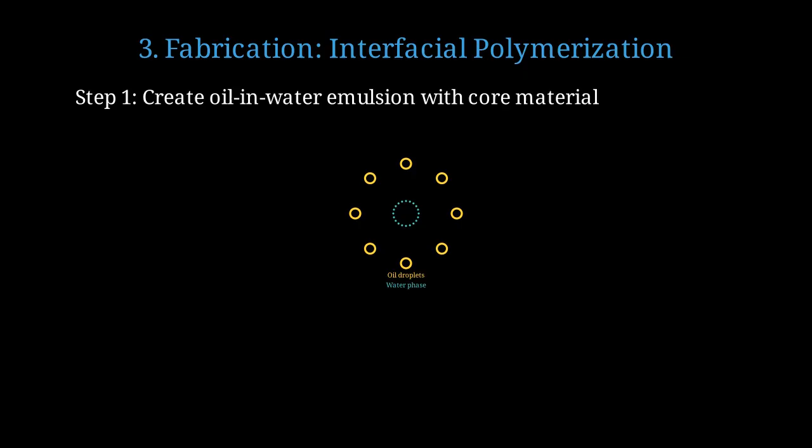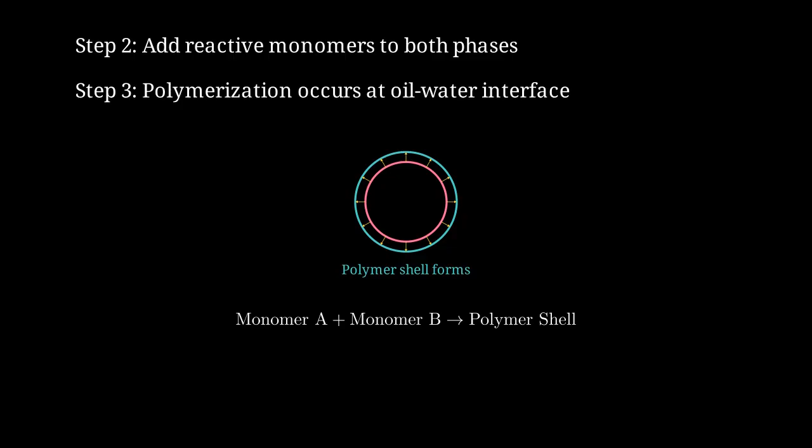Next, we add reactive monomers to both the oil and water phases that will meet at the interface. When the monomers meet at the droplet surface, they react and polymerize, forming a solid shell. The polymer shell forms spontaneously at the interface, encapsulating the core material in a protective barrier. This reaction between two monomers creates the polymer network that becomes our capsule shell.

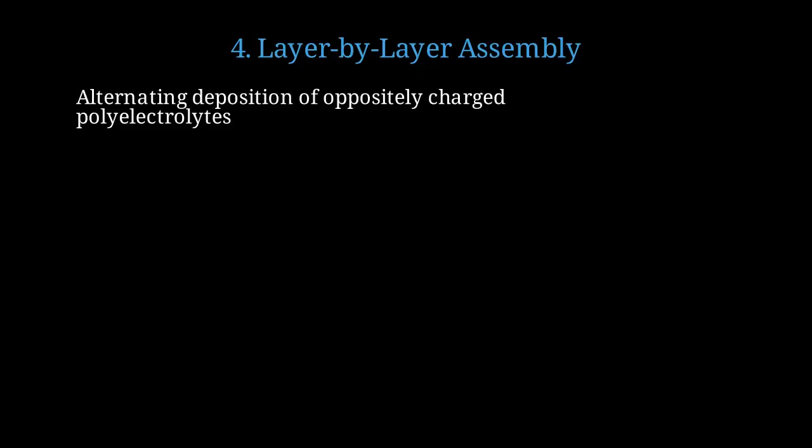Another powerful technique is layer-by-layer assembly, building shells one molecular layer at a time. We alternate deposition of positively and negatively charged polymers, building up layers through electrostatic attraction. Each layer adds about 1 nanometer of thickness, allowing precise control over shell properties and permeability. This technique gives nanometer scale precision in shell thickness and composition.

Now let's understand the mechanical behavior of these thin shells using continuum mechanics. The Laplace law is fundamental for understanding how pressure differences are balanced by shell tension. ΔP = 2γ/R, where γ is surface tension and R is capsule radius.

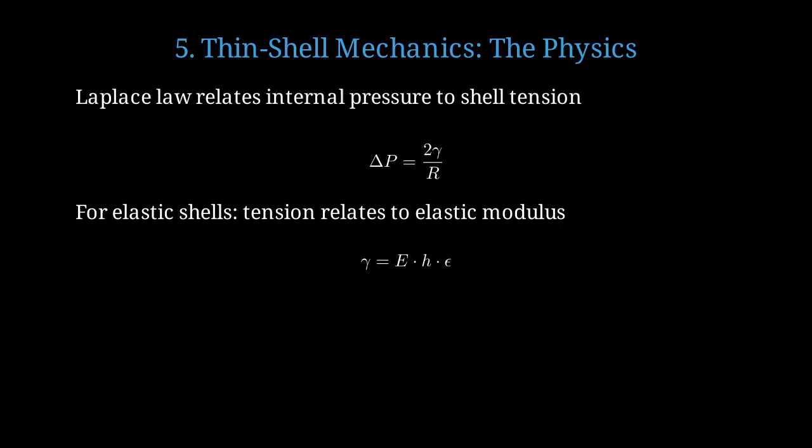For elastic shells, we must relate tension to the material's elastic modulus and shell thickness. γ = E·H·ε, where E is elastic modulus, H is shell thickness, and ε is strain. Combining these, the pressure difference equals 2EHε/R.

Shells buckle when compressed beyond a critical pressure, determined by geometry and elasticity. Critical pressure is approximately EH²/(R²(1 − ν²)), where ν is Poisson ratio.

Let's solve a practical design problem. How thick must a capsule wall be to survive blood flow but break in the stomach? In blood vessels, capsules experience shear stresses of 1 to 10 pascals from flowing blood. In the stomach, capsules face both acidic conditions and mechanical pressure of 100 to 1,000 pascals from churning.

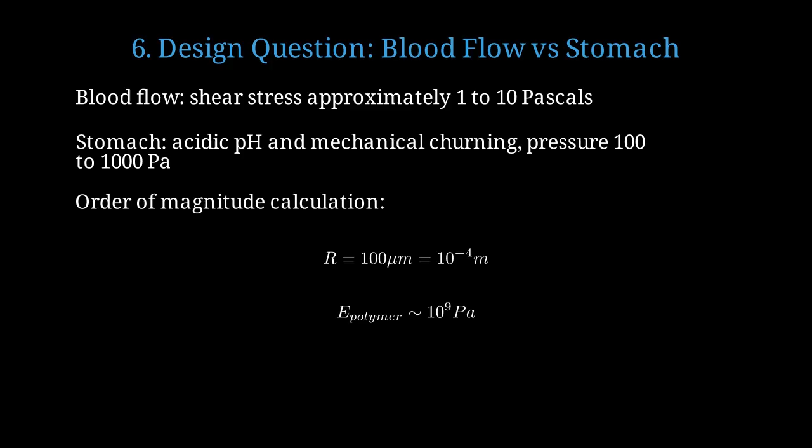Let's do an order of magnitude calculation to estimate the required shell thickness. Assume capsule radius of 100 micrometers, which is 10⁻⁴ meters. Typical polymer elastic modulus is around 1 gigapascal or 10⁹ pascals. Blood pressure is 10 pascals. Stomach pressure is 500 pascals.

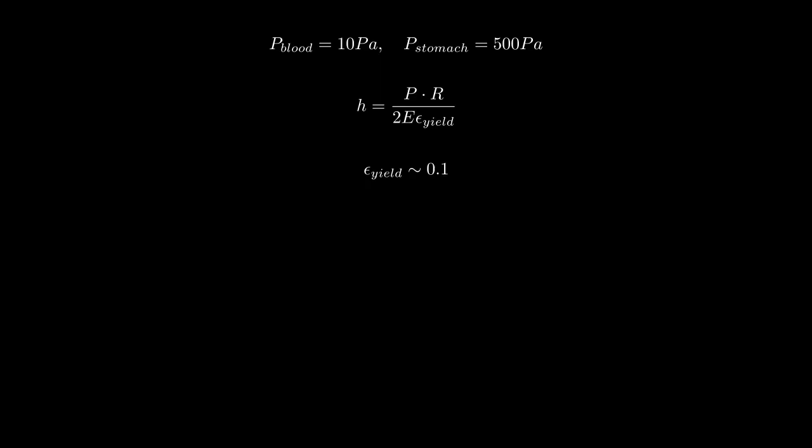From our earlier equation, shell thickness H equals pressure times radius over 2E times yield strain. Assume yield strain of about 0.1, or 10% elongation before failure. For blood flow, we need thickness of about 5 nanometers to avoid deformation. For stomach rupture at 500 pascals, we need shells thinner than 250 nanometers.

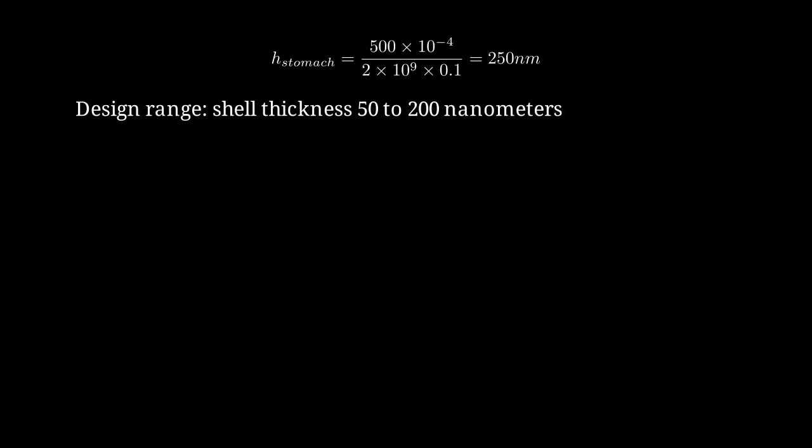Therefore, a shell thickness between 50 and 200 nanometers would survive blood flow but rupture in the stomach. This design window ensures the capsule survives circulation, but releases its contents in the digestive system.

Let's analyze how capsules rupture when subjected to hydrodynamic forces in flowing fluids. In shear flow, capsules deform from spheres into ellipsoids, creating stress concentrations. Under shear flow, the spherical capsule deforms into an ellipsoid, with maximum stress at the poles.

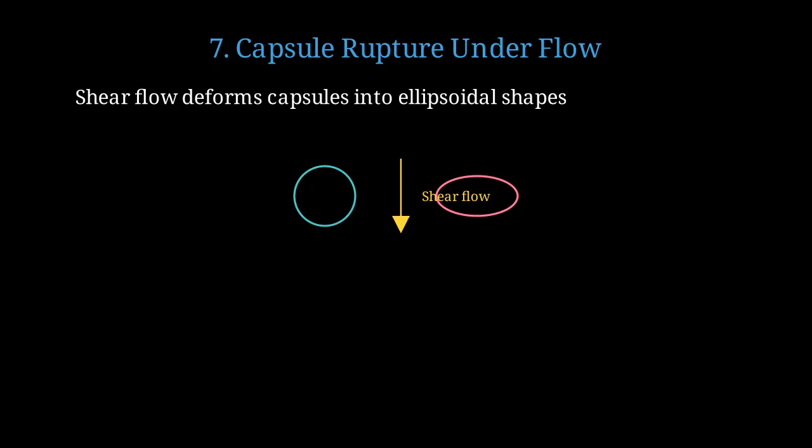The capillary number Ca equals viscosity μ times shear rate γ̇ times radius over surface tension. For capillary numbers less than 0.1, deformation is small and capsules remain stable. When capillary number exceeds 1, deformation becomes large and rupture becomes likely. Critical stress for rupture is approximately EH/R, proportional to elastic modulus and thickness.

Let's work through a complete numerical example for a drug delivery capsule. Consider a 5 micrometer radius capsule with 100 nanometer thick shell. Shell modulus is 500 megapascals. Blood viscosity is 3 millipascal seconds.

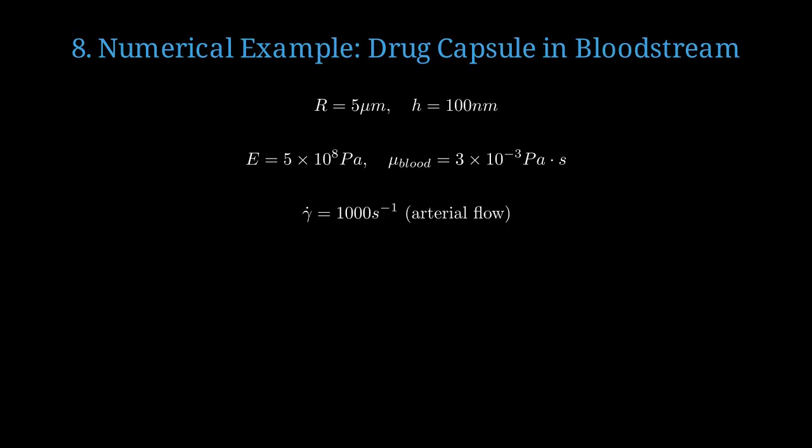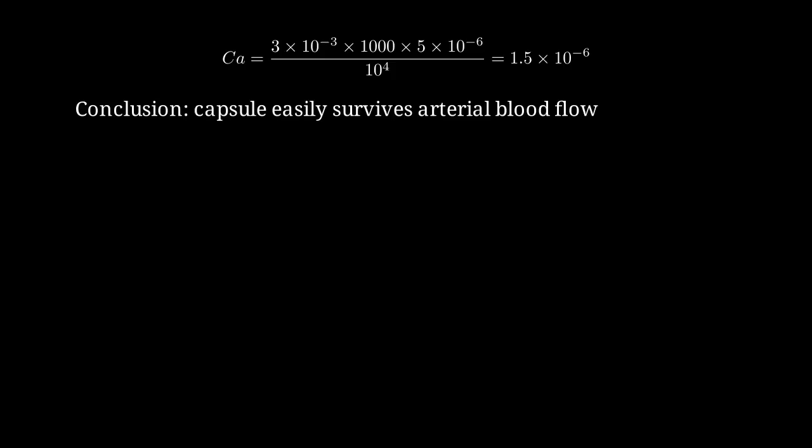In arterial flow, shear rate is about 1,000 per second. Effective surface tension is 10 to the 4 newtons per meter. Capillary number is only 1.5 times 10 to the minus 6, much less than 1. With such a low capillary number, this capsule will easily survive arterial blood flow without rupturing.

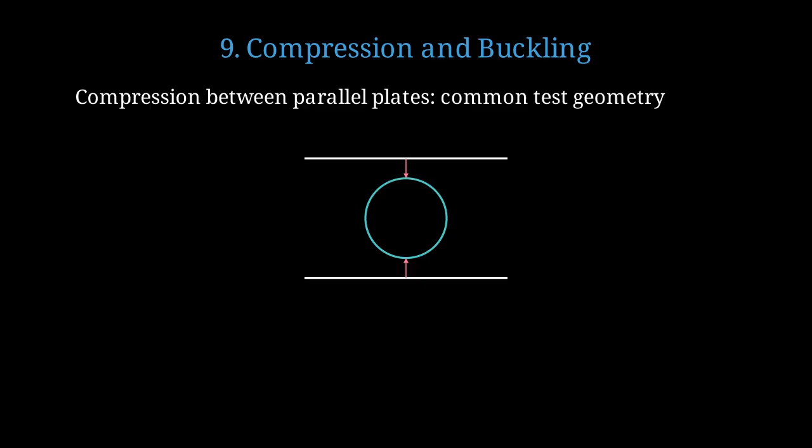Now let's examine what happens when capsules are compressed between surfaces. A common test is compressing capsules between parallel plates to measure mechanical properties. Capsules compressed between plates first flatten, then buckle when critical pressure is exceeded. Compression force equals 4 pi EH squared over R times 1 minus nu squared times displacement delta.

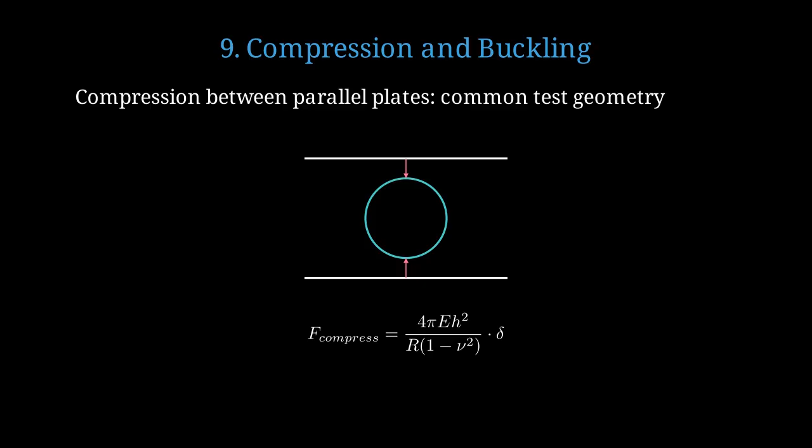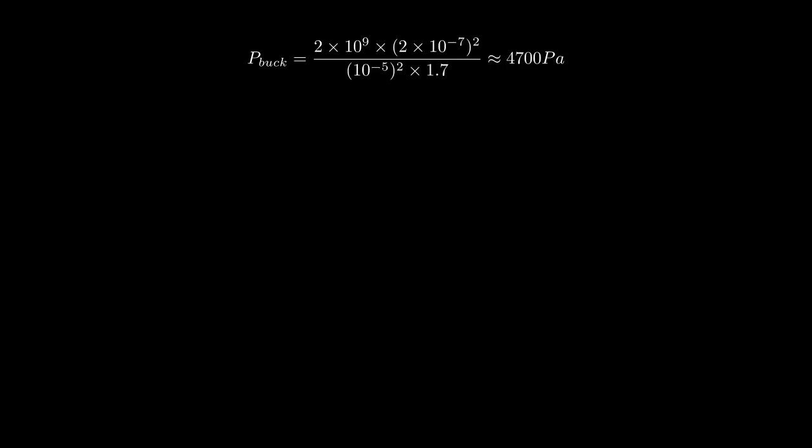Buckling instability occurs when parts of the shell experience compressive stress. Buckling pressure is 2 EH squared over R squared times square root of 3 times 1 minus nu squared. Let's calculate buckling pressure for a typical capsule. Buckling pressure is approximately 4,700 pascals, easily exceeded by finger pressure.

Microcapsules revolutionize drug delivery by enabling targeted and controlled release. Capsules can be designed to accumulate at specific disease sites through size selection or surface modification. After injection, capsules travel through circulation and release their drug payload at the target site.

Release can occur through slow diffusion through the shell or rapid rupture triggered by pH, temperature, or enzymes. The shell protects sensitive drugs from degradation in the bloodstream until they reach their target. Diffusive release rate equals diffusion coefficient D times concentration difference over shell thickness H.

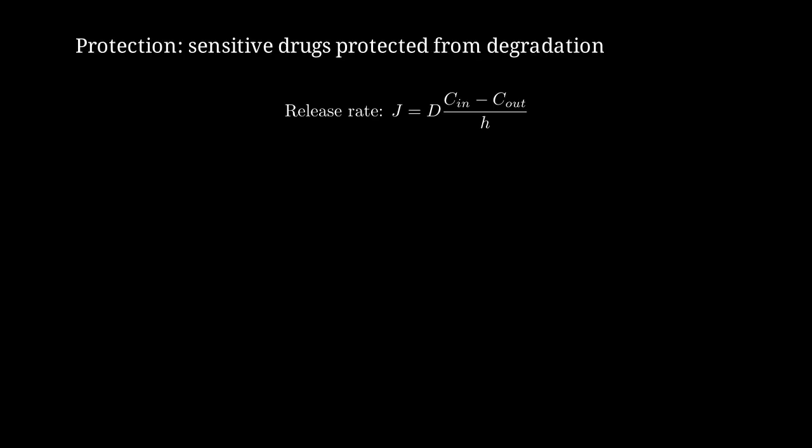In food science, microcapsules protect flavors, vitamins, and active ingredients. Encapsulating flavors prevents evaporation and oxidation, preserving taste until consumption. Probiotic bacteria can be encapsulated to survive stomach acid and release in the intestines. When you bite a food product, mechanical stress ruptures the capsules, releasing intense bursts of flavor. Vitamins like vitamin C are protected from oxidation, maintaining potency during storage.

Self-healing materials use microcapsules filled with repair agents that activate upon damage. Capsules containing liquid monomers or adhesives are embedded throughout the material matrix. When a crack propagates through the material, it ruptures capsules, releasing healing agent that flows into the crack.

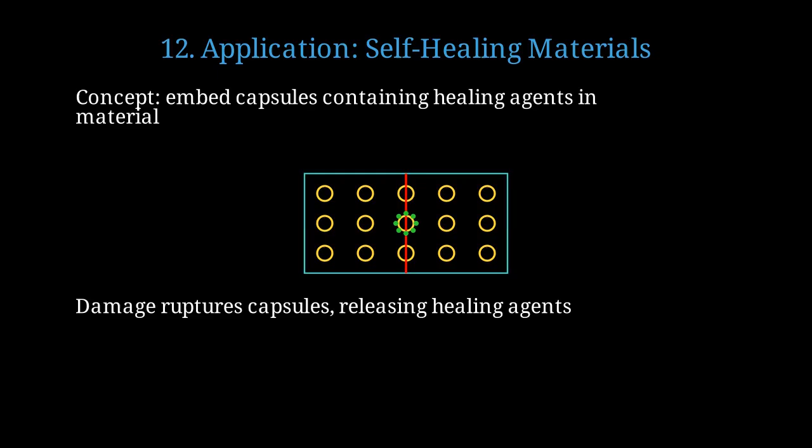The mechanical stress from crack propagation ruptures nearby capsules automatically. The released monomer contacts a catalyst in the matrix and polymerizes, sealing the crack. Healing efficiency is the ratio of healed strength to original virgin material strength. Real self-healing systems can recover 60 to 90% of the original material strength.

Advanced designs include multi-core capsules for sequential release or triggered reactions. Multi-core capsules contain separate compartments with different active ingredients for complex release profiles. This enables sequential delivery of multiple drugs or controlled mixing of reactive components.

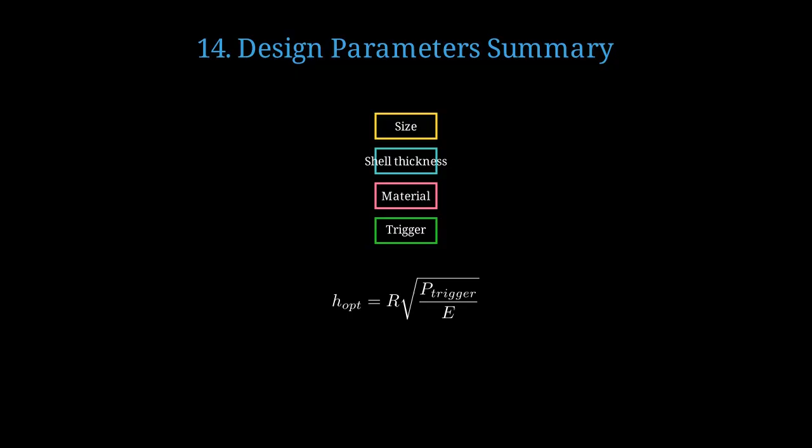Let's summarize the key design parameters that engineers must balance. Engineers must optimize capsule size, shell thickness, material choice, and release trigger mechanism. Optimal thickness H equals radius times square root of trigger pressure over elastic modulus. There's always a trade-off between capsule stability during storage and ease of release at the target.

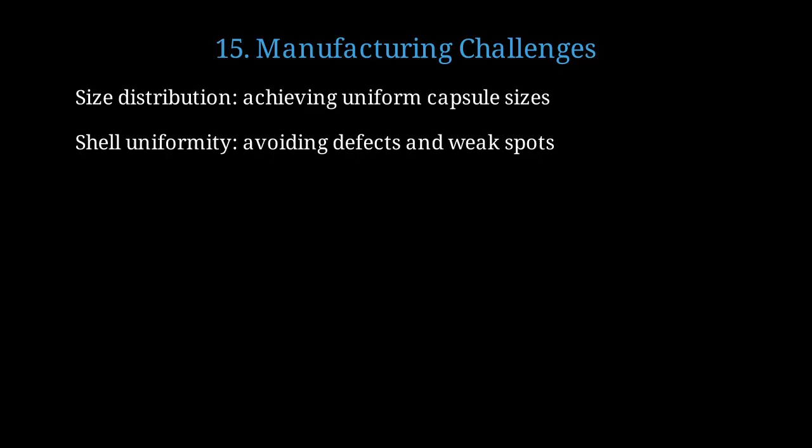Despite advances, manufacturing consistent microcapsules at scale remains challenging. Producing capsules with narrow size distribution is difficult, but critical for consistent performance. Shell uniformity is essential because even small defects can cause premature rupture. Scaling up production while maintaining quality control presents significant engineering challenges. Advanced manufacturing techniques like microfluidics can produce highly uniform capsules, but at lower throughput.

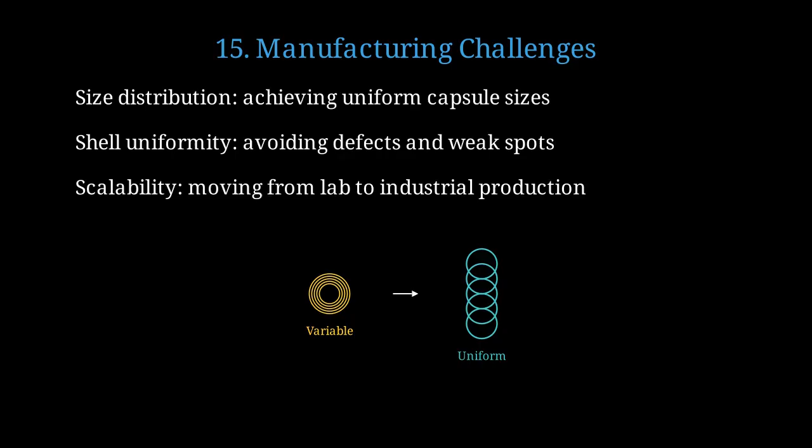The field continues to evolve with exciting new directions and applications. Future capsules will respond to multiple simultaneous triggers like pH plus temperature plus light. Capsules could detect disease biomarkers and automatically release therapeutic agents in response. Some researchers are creating artificial cells where encapsulated enzymes perform metabolic reactions. Future smart capsules will integrate multiple sensing and response mechanisms in a single platform.

Let's summarize the key concepts from this comprehensive lecture. Microcapsules function as engineered cells with shells we can design for specific applications. We can choose from polymers for strength, lipids for biocompatibility, or proteins for biodegradability. Main fabrication methods are interfacial polymerization for speed, or layer by layer for precision.

The mechanical behavior is governed by thin shell theory, Laplace law, and buckling instabilities. Successful design requires carefully balancing stability during storage with ease of release at the target. Applications span from targeted drug delivery to flavor encapsulation to self-healing materials. Microcapsules are versatile platforms for a wide range of applications.